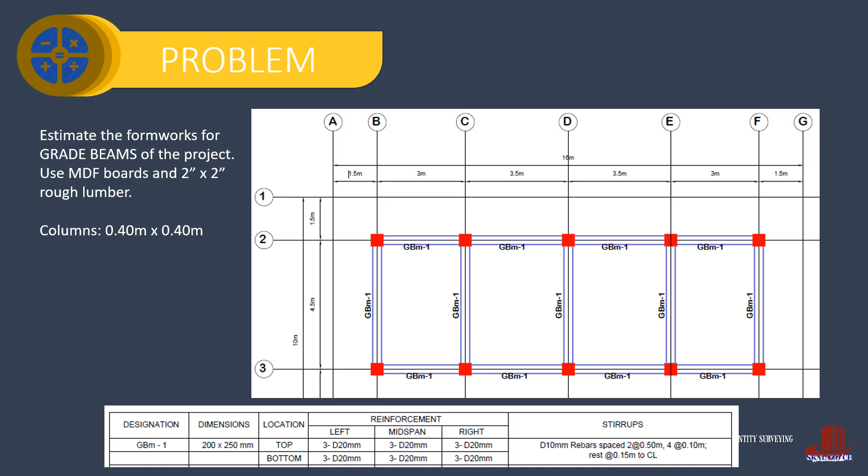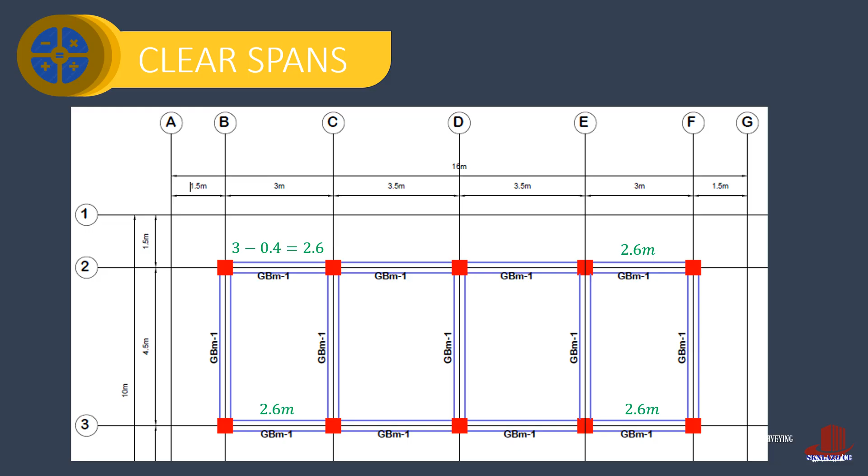Before solving boards and studs, we have to clarify the clear spans for each beam, as the formworks for the intersection would be easier to estimate under columns. Having dimensions taken on centers and column width of 0.4 meter, the clear span for the 3 meter length is 2.6. From the 3.5 is 3.1, and from 4.5 is 4.1 meter. So even if there are a number of beams in the framework, we would only be solving 3 spans.

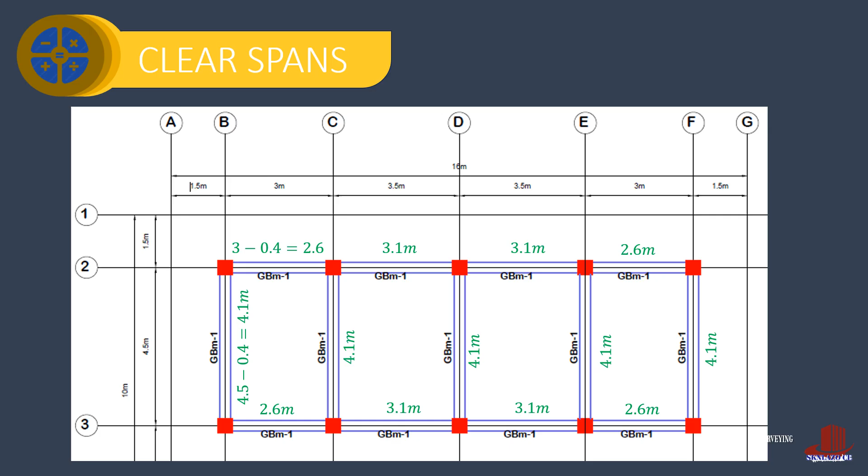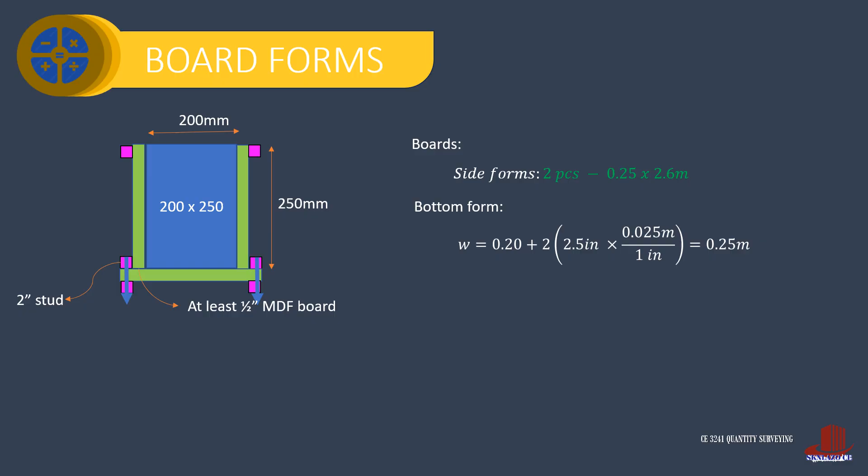For the board forms, we use the cross-section where the width is 200 mm and depth is 250. Estimating the side forms, we only have to use the beam depth, so we can say 2 pieces of 0.25 meter width by 2.6 meter length when we consider the first length. For the bottom form, the width is then 0.2 plus twice of 2.5 inches, which gives 0.25 meter. The bottom form is then 1 piece of 0.25 by 2.6 meter.

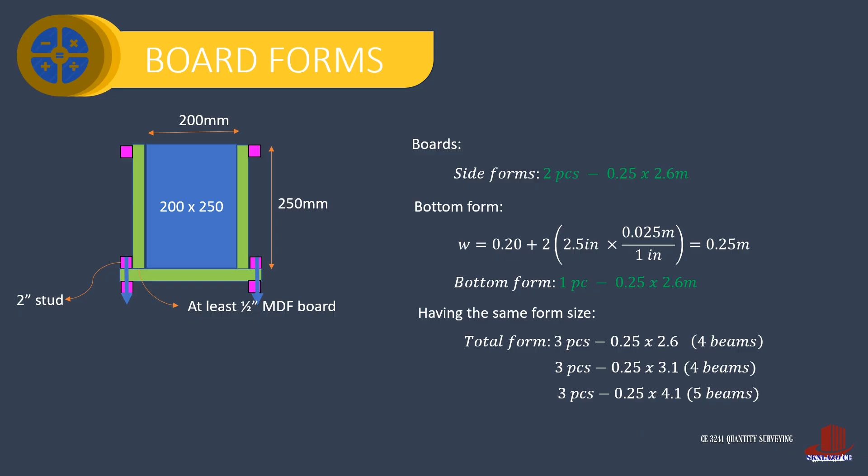Notice that the size of side forms is the same with the bottom form, which means we are to consider 3 pieces of 0.25 by 2.6 meters for that specific span. And we have 4 beams. By analogy, we can also deduce that there will also be 3 pieces of 0.25 by 3.1 meters, also 4 beams. Then another 3 pieces of 0.25 by 4.1 meter, which have 5 beams from the beam plan.

Summarize the board sizes in order to arrange them for the cutting list. First is the 4 beams of 3 pieces, making 12 pieces of 0.25 by 2.6 meter. This span can be cut into 2.4 and 0.2 meter. The next length is 3 pieces times 4 beams, or another 12 pieces of 0.25 by 3.1 meters. We cut this length using the full length of 2.4 with 0.7 meters.

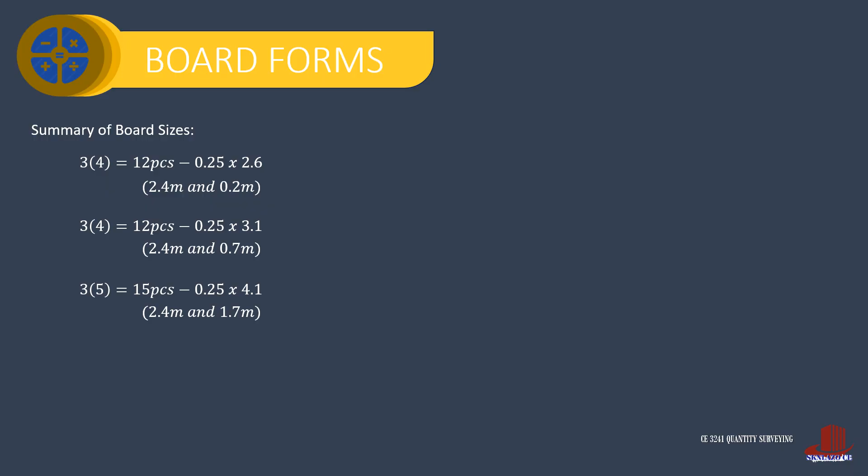The last size is 3 pieces by 5 beams, or 15 pieces of 0.25 by 4.1 meters. These can be cut using 2.4 again and 1.7 meter combination. Let us now cut the MDF boards according to the form sizes. For the 2.4 meter length, we cut widths of 0.25 meters, making 4 pieces. Having 3 MDF boards to make 12 pieces with the excess of 0.2 meter width. The excess will be used for the 12 pieces of 0.25 by 0.2 meter small forms.

For the next batch, take a board and cut 4 pieces of 0.25 meter width again, leaving 0.2 meter at the end. We use 3 boards to account for the 12 pieces. Then, for the 0.7 meter length, use another board and cut 0.25 meter width. We can take 9 pieces, leaving an excess of 0.15 meter. The remaining cut of 0.5 meter width will be used for the 3 remaining pieces.

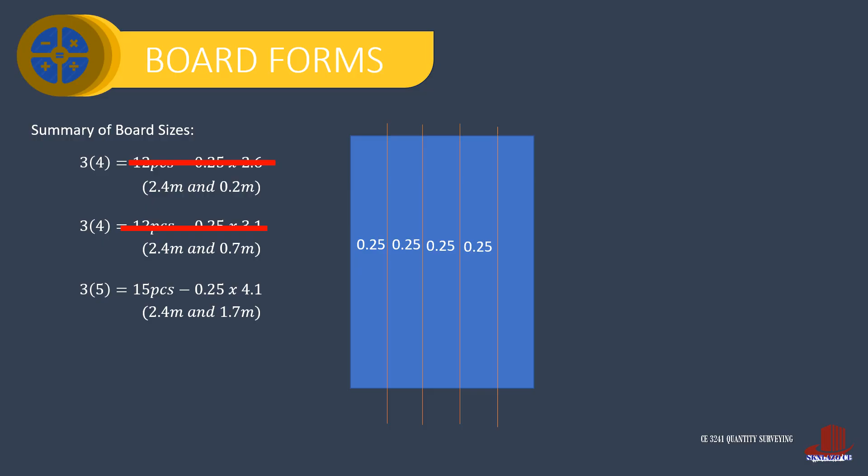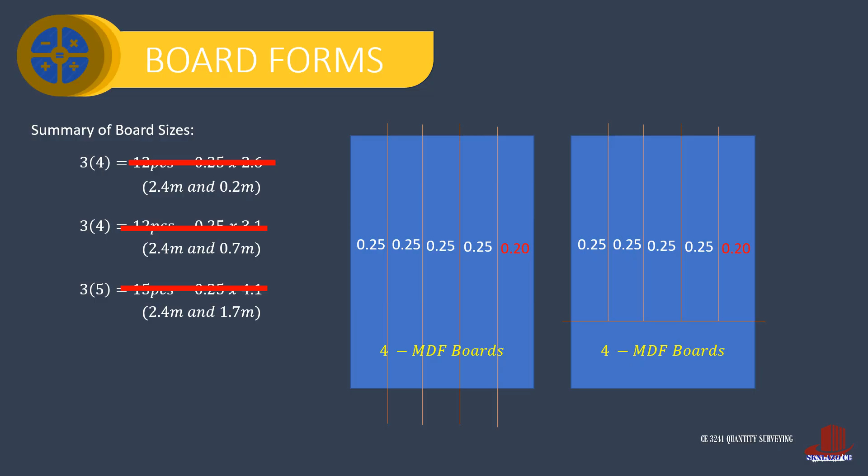For the third length, we cut the board with 4 pieces of 0.25 meter. And since we need 15 pieces, we are to use 4 boards with 0.2 meter excess. For the other length of 1.7 meters, we take a board and cut it into 4 pieces again. We would have to use 4 MDF boards to account for the 15 pieces. So by direct counting, the total number of boards is 15 pieces.

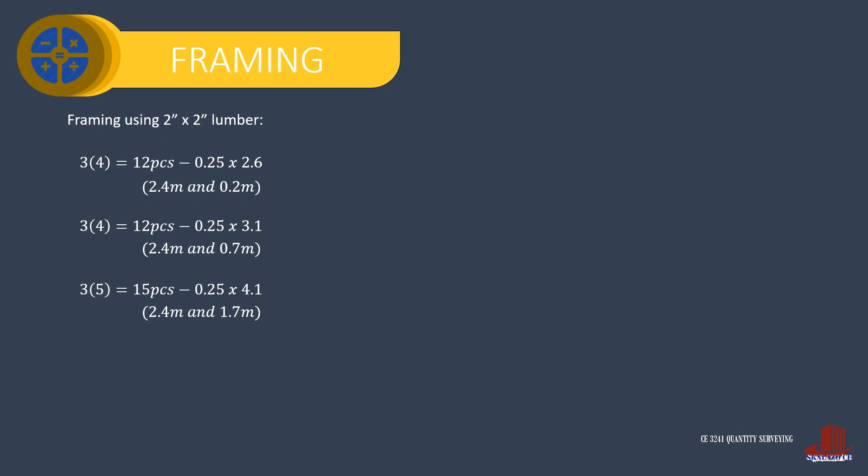After the boards, we estimate the framing. This time, we can rearrange the forms into the cut lengths of the board. Since there are 2.4 lengths on each batch, we can take the summation of 12, another 12, and 15, or 39 pieces of 0.25 by 2.4 meters. Then 12 pieces of 0.2 meter length, 12 pieces of 0.7 length, then 15 pieces of 0.25 by 1.7 meters.

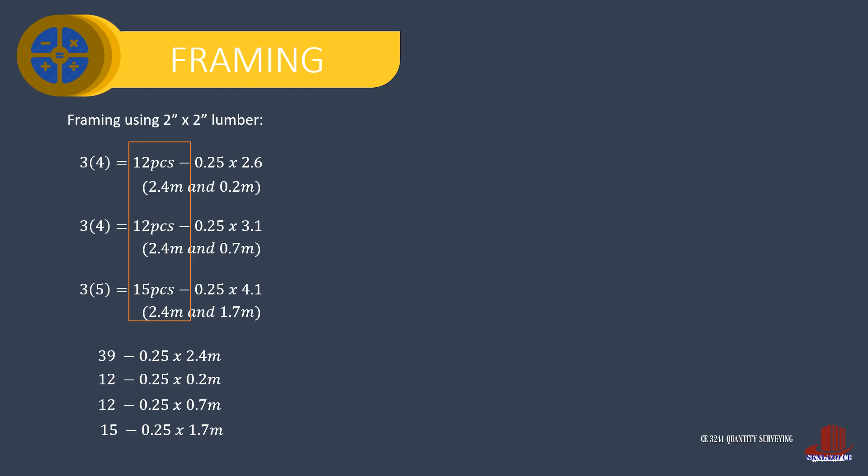Let's start with the 2.4 meter length. The top and bottom studs are 0.25 meter. Then the vertical studs have length of 2.4 minus 2 of 0.05, or 2.3 meters. The total stud length for the form is 2 times 0.25 plus 3 times 2.30, giving 7.4 meters. We are to have 39 forms, so the total stud length is 39 times 7.4, resulting in 288.6 meters.

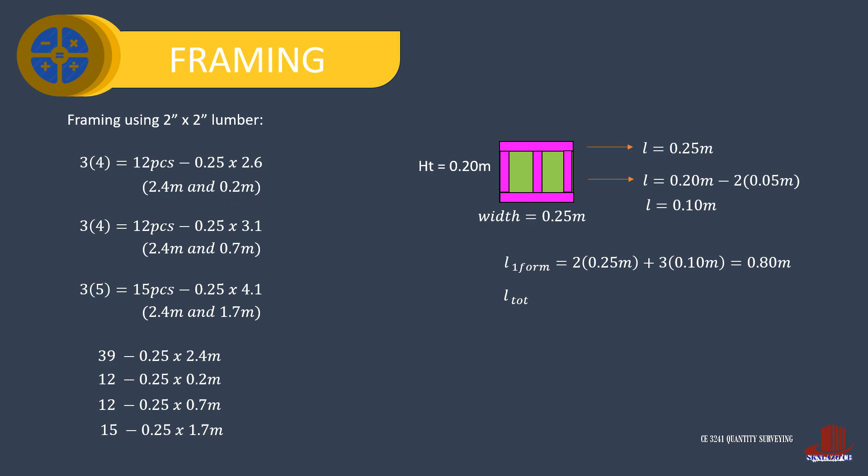For the 12 pieces of 0.25 by 0.2, the form will have a top and bottom stud of 0.25 meter length. Then the vertical studs are 0.2 minus twice of 2 inches, which gives 0.1 meter. For each form, the stud length is 2 times 0.25 meter plus 3 times 0.1, and that is 0.8 meter. 12 pieces of form is then 9.6 meters.

Next is the form with 0.7 meter length. The top and bottom studs have a width of 0.25 meter. The longitudinal stud's width is 0.7 less twice of 2 inches, and that gives 0.6. The stud length of one form is 2 times 0.25 meter plus 3 times 0.6 m, which is equal to 2.30. The total length is 12 of 2.30, which gives 27.6 meters.

The last length is 1.7 meters. The form has top and bottom studs of 0.25 meters. Then the vertical studs have 1.7 minus 2 times 0.05, which gives 1.6 meters. So the length of stud for one form is twice of 0.25 plus thrice of 1.6, making 5.3. The total stud length is 15 times 5.3 meters, giving 79.5.

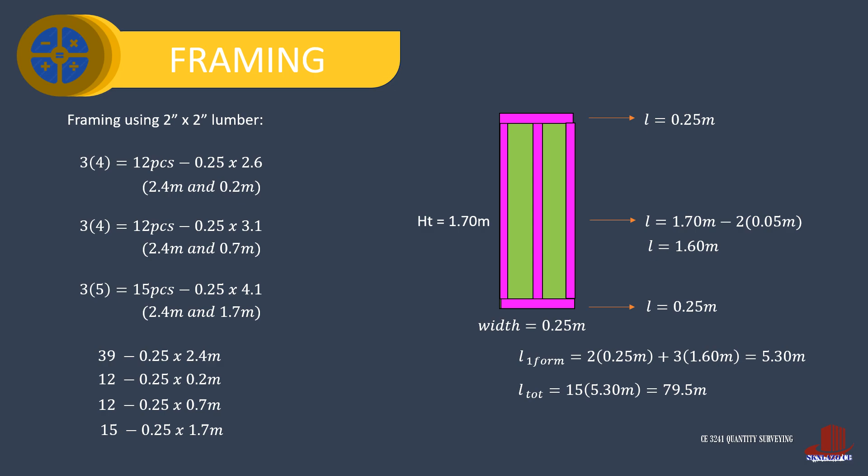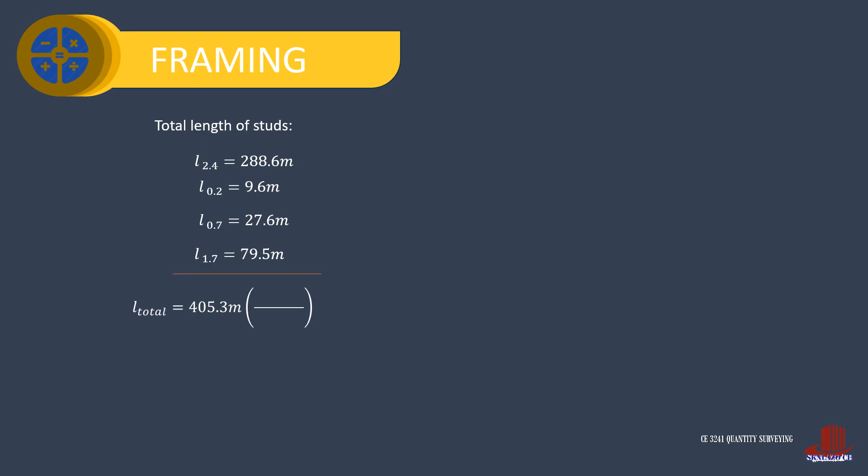Take the summation of all stud lengths, where from the 2.4 span, we have 288.6 meters, 9.6 from 0.2 form, 27.6 meters from the 0.7 span, then 79.5 for the 1.7 length. The summation is 405.3 meters, which we convert into feet and have 1,329.39 feet. Take the board feet by multiplying this by 2 inches lumber width and 2 inches depth, resulting in 443.128, rounded to 444 board feet. Also, don't forget that the total number of boards is 15 pieces of 4 by 8 MDF with thickness of half an inch.